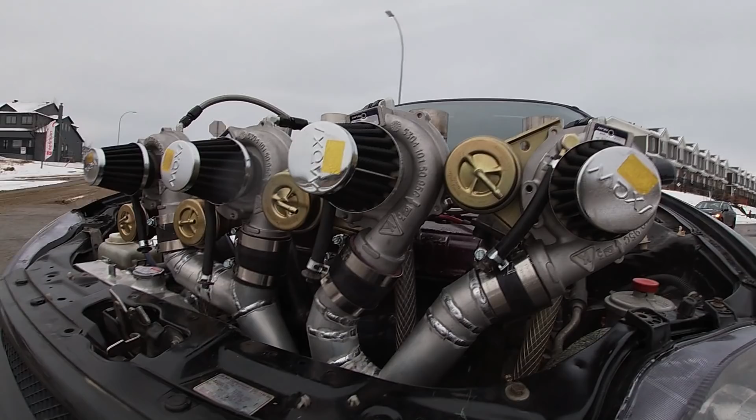Thanks, peace, easy. Let's start the video. How are we supposed to test when it's snowing out? What the hell? We're back today.

We're going to do some more testing on this thing. I did a lot more reading on the Hondata, a lot more playing around, and I think I've got some more stuff figured out with it. I did get my stickers in, look at them, that's me.

I remember in the last video we hit about 5 pounds of boost on the boost gauge, and then you guys said these wastegates are about 5 pound springs. So to put that to the test, I loosened these off fully, put 2 turns on this nut, and pulled the actuator so there's actual tension on it, meaning any little bit of movement isn't going to open the wastegate right away. I'm hoping that'll hold more boost.

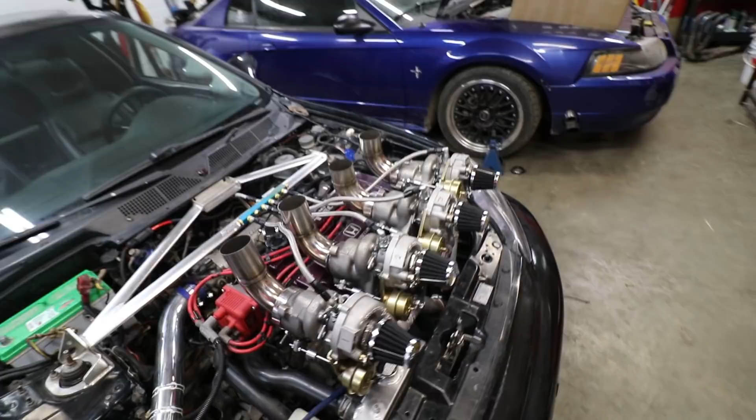We still have the race fuel in it, let's get the laptop set up. I'm so excited just to drive it, even though it's snowing outside. So yeah, I got a GoPro on my head. I spent a lot of time just trying to navigate the S300.

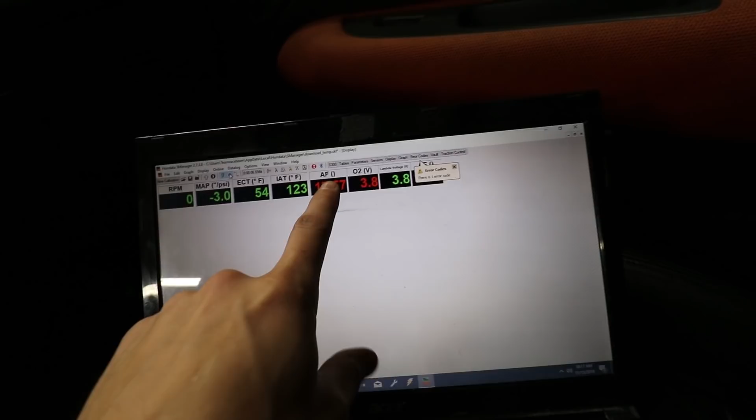Learning where everything is, trying to change all the tables so it's something that I like. Right now I'm working on trying to get the air fuels instead of being a voltage or a Lambda, I'm just trying to get them to an air fuel number, because in my head air fuel numbers make sense more than Lambda numbers, even though Lambda's super way easier since 0.8 is good and 1 is stoich, and above that it's lean. But I'm just doing what I gotta do. There we go, I just had to reset it. Now I got it from Lambda to air fuel numbers, so now we can start there.

We have 1 error code, I believe it's intake air temp. Yeah, we don't have that hooked up. So we can do a data log, look at our thing, and make changes from there. And that is the basics to our tuning.

See how shit the roads are right now too.

I'm just waiting for the coolant temp to come up. It's only at 132, I think it hits boost cut before 140, so... the guy on the roof's giving me a weird look.

Quick little pull, we hit 5 pounds of boost still. All right, my GoPro died, but I believe we hit 6 pounds of boost on the gauge.

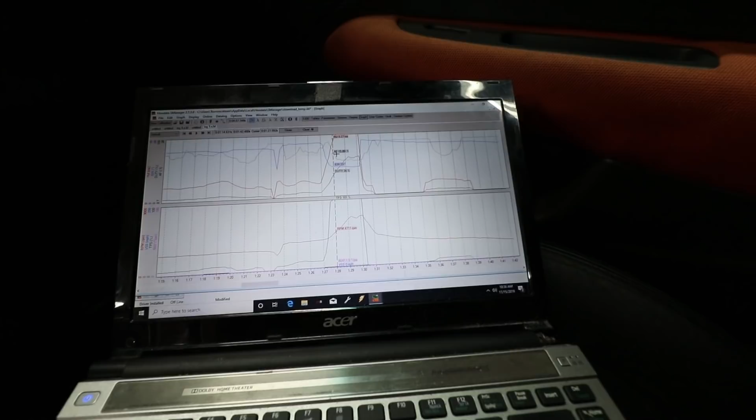Our map isn't actually dialed in perfectly, so when the car is off it reads like -1 mercury, a vacuum. So here's our log from our last one, we go full throttle here. We're at 1 pound of boost at 4,500, 1.8 psi at 4,800, 2.7 at 5,000. Remember, last test session our map only read 3.1 before we made any changes.

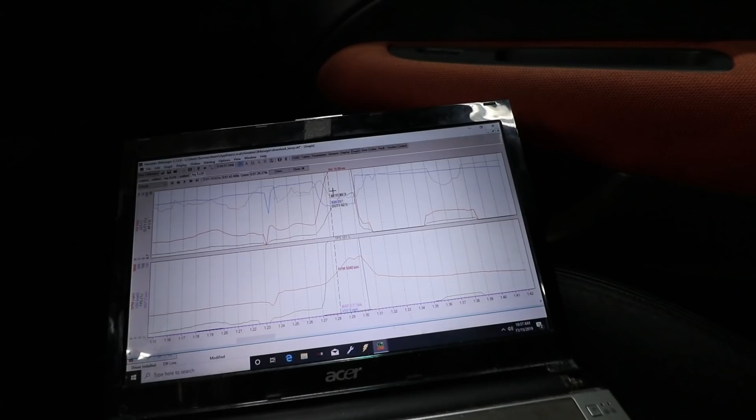So our air fuel is 11.8, 23 degrees of timing on race gas at 5,000 RPM, 2.7 psi, and at 5,800 we're at 3.5, so we already broke our last PSI record there. Up to 4.0 at 6,600 RPMs, still 11.4 air fuels, 23 degrees ignition timing.

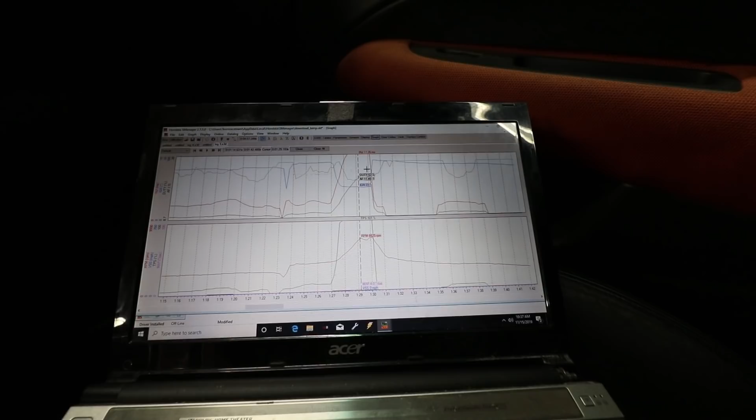That might be a little bit much, I might take some out. 4.1 PSI is our peak for now. So once again, we're trying to test in shit Canadian weather, we have studded winter tires on the front, actually.

But we really got some diagnosing to do, because it's not making sense why they're not making more boost than that. I'm gonna hook up my air compressor, try and turn the regulator all the way down. And there goes the heater.

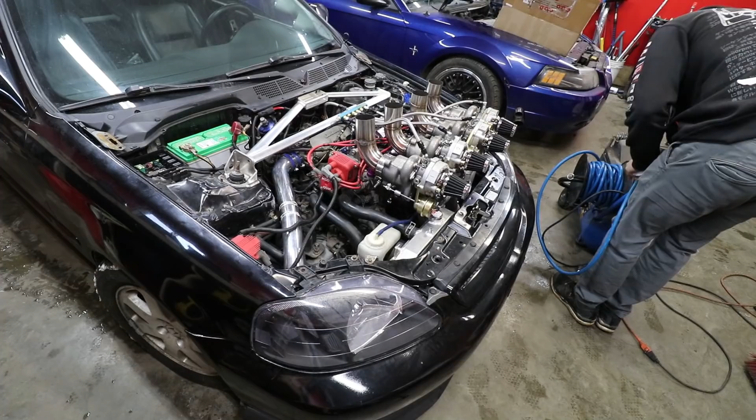I'm just gonna unplug one of these wastegate lines and see how much pressure it takes to actually open it. Well, that's not very accurate at all. This isn't gonna be the be-all, end-all of tests, just trying to diagnose things. Better to diagnose it now than be on the dyno with Brent and not be able to make any boost.

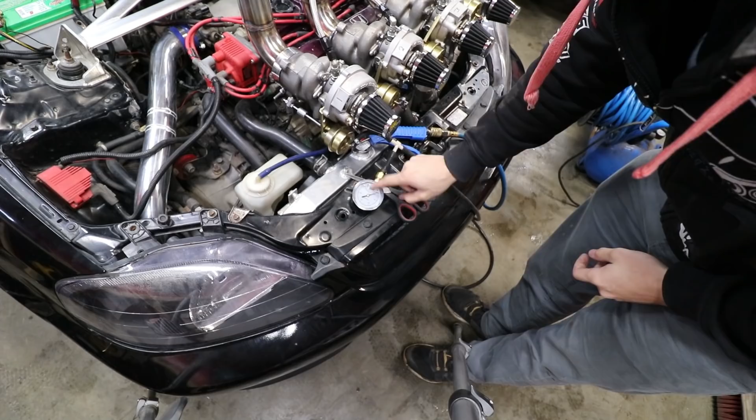Okay, let's see if we can tee in like a pressure gauge or something here. Do I have a pressure gauge? So this is gonna be our little makeshift thing, we have a 100 PSI gauge. It's not gonna be super accurate, but it does include a 10 pound increment on it, so anything less than 10 pounds will tell us this thing is like a really weak spring.

Okay, so it's fully open at 5 PSI. You see that? I hope you guys can see it. Let me readjust this camera here, keep an eye on that. I'll put this right like here.

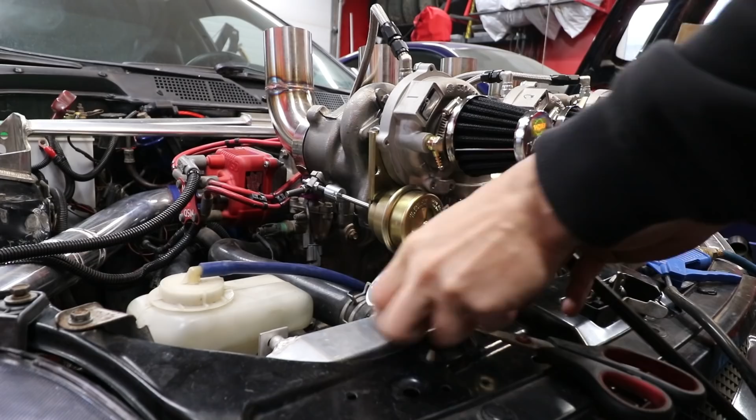Now we'll do this real quick. You can see that this line right here references 10 PSI, we don't even come near it, and you can see the wastegate is fully open. So, in fact, according to this gauge, it's fully open at like, I don't know, yeah, 5 pounds.

Not even close to 10 pounds and it's all the way actuated, so now we've got to come up with a solution for that. I didn't anticipate this because right here in the specs it says internal wastegate is a 12 PSI wastegate. You can see here, 12 PSI. I figured 12 PSI would probably be plenty, but 5 is not enough.

So that's why it's just tapering off boost even though it wants more. Spool can be slow because as soon as it hits 1 to 3 pounds, it seems like those wastegates are opening. Since it's such a small turbo, I'm not sure if they calibrate the spring size by overall boost on a 1.8, since a 1.8 only runs one of these turbos. I'd guess it's probably a 5 pound spring in it, but the wastegate flapper is fully open and boost is just creeping itself up to 12 pounds. I'm pretty sure that's the case.

Here's my simple hood rat solution just to test my theory. We block off - okay, that one's not gonna work because that was backwards. So what we're gonna do is block off and run the wastegate open to see if we can build any more boost faster.

Exhaust back pressure is still gonna push these wastegates open on the flappers, but I'll set boost cut to like 10, 12 pounds just as a safety measure. I'm just going to do a pull and see if we can climb a little past where we've been getting stuck. If we can, that means the engine is fully capable of spinning these turbos - it's just the wastegate actuators that aren't working in our favor. If that all works, maybe we'll make some sort of boost control setup for all four of them and go from there.

So we'll go back out and test it one more time, and hopefully no one calls the cops on us. Put our helmet cam back on and try this again.

Handbrake turn! Yes! Let's do hood rat shit!

Turbo's already spooling, go! Yep, we hit 10 pounds baby! That feels like more power! More power baby, and more power baby! Oh yeah, this is what we've been waiting for.

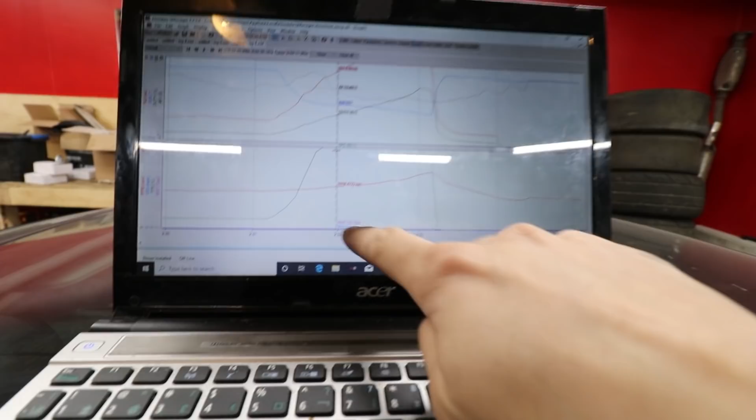Bam, bam, bam, our test was a success. We made more boost - I saw it hit 10 pounds on the gauge before I let out at like 6,000 RPM. We have the laptop, so we'll get the actual logistics because I like to say things are bigger than they actually are, especially to my girlfriend. Log 6, baby. Oh boy, that's a lot to look through.

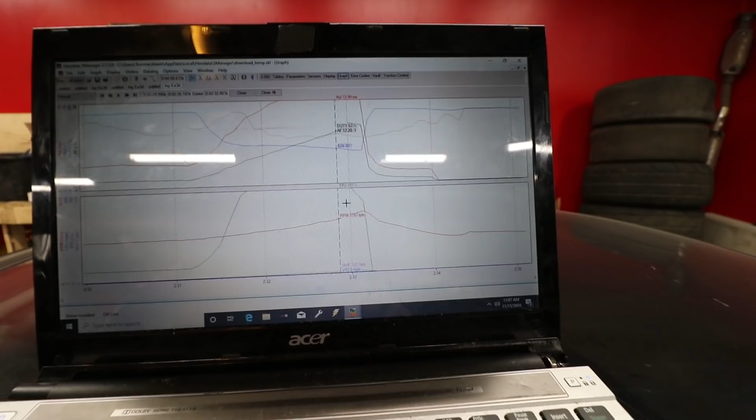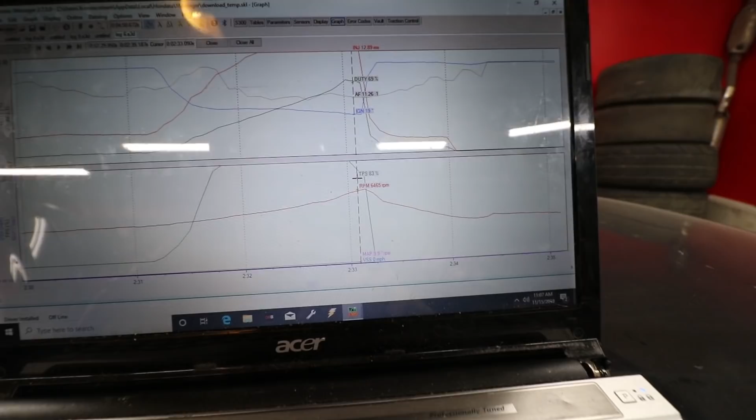This looks like our biggest one right here. Here it goes: 1.6 pounds of boost at 4,700 RPMs, still 2.1, 2.8 at 5,000 RPM, 4.1, 5.8 - that's a new record, 6.6 at 5,500, 7.2 at 5,700, 7.7 at 6,000, 9.9 PSI at 6,500 RPMs, and then it held 9.9.

I think we let out though. TPS is 83% now, so we were letting out right about here. We let out at 6,200, 8.6, and we still made 9.9.

Hey, that's exciting! Except for the fact that we have to figure out how we're going to control the boost in these things. I have a feeling that when we get to the dyno, those wastegate hoses are coming off and we're just going to run whatever it can run. We're just gonna full send it. Moon tune, baby. I have a feeling the wastegate flappers are just gonna open themselves up, because I'm trying to explain this the best and easiest way I can.

Inside this wastegate, there's a rubber diaphragm, round, with a certain diameter and surface area. If you put 5 PSI on top of the surface area of that rubber, it's enough to overcome the weight of this spring. Now there's also a circle where this wastegate flapper is, but its diameter is only about half the size. So your exhaust back pressure can still manage to put enough pressure on that little circle to overcome the weight of the spring. So the turbos might actually regulate themselves through the wastegate flapper with excessive exhaust back pressure.

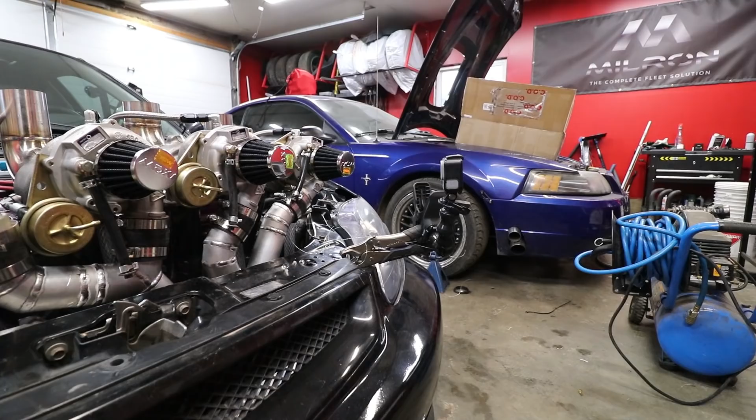It's not ideal. We're gonna try and get a setup in the front, whether it's a boost controller or a manual boost controller or something, but that is big headway.

I also did not check to see what our timing and air fuel was to make sure that we were safe. 11.5 air fuel, our injector duty cycle was 72%. We might need bigger injectors, I might borrow some from someone. Someone's got 1,000 cc sitting around somewhere. 19 degrees of timing, 11.5 air fuel, and 8.6 pounds of boost, which is perfectly fine in my books anyways. What do I know, I'm not a tuner.

Trying to get all those best angles. We got vice grips here, and then we clamped onto the vice grips. I'm trying to use fishing line to secure the GoPro just in case it falls off, but I can't tie knots, so if you can't tie knots, just tie lots. The best angles, baby. One more test, let's just see if it'll hit 15 pounds. Why not? We're getting the good footage, right?

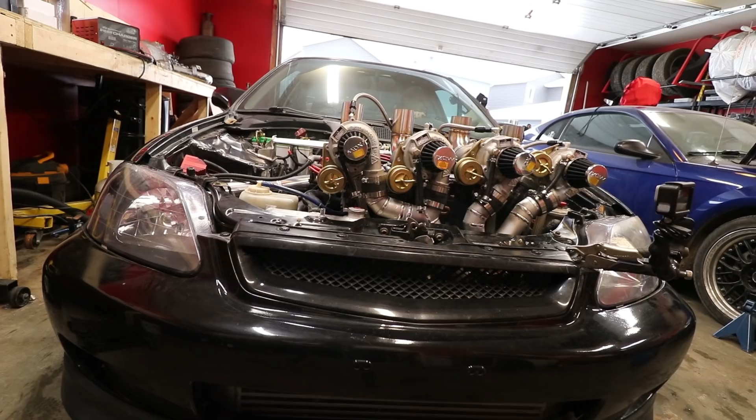I think this is our first real test of driving it around and getting it hot, because the exhaust sides of the turbos are actually starting to bake the paint off them kind of. And we hit boost cut at 15 pounds of boost. Sorry, not sorry, I guess she's getting the moon tune. That's with no wastegate lines hooked up too, so we might have to put some sort of boost controller in it. I purposely set boost cut so it would hit it.

Well, that's not fucking good. I'm like, where's my phone at? And I'm looking around, looking outside and everything. It's right here, underneath my tire. How did I do this?

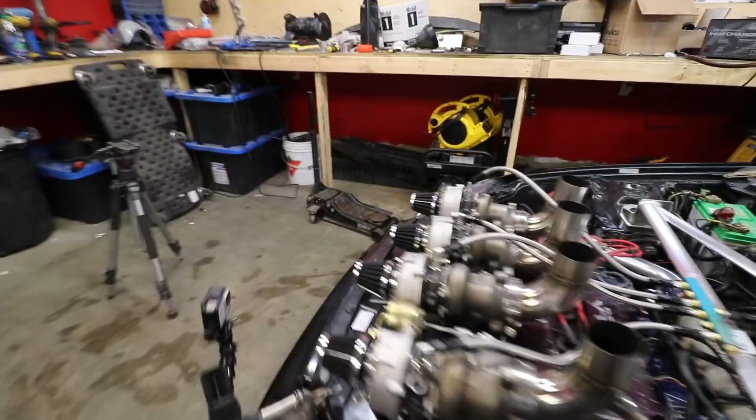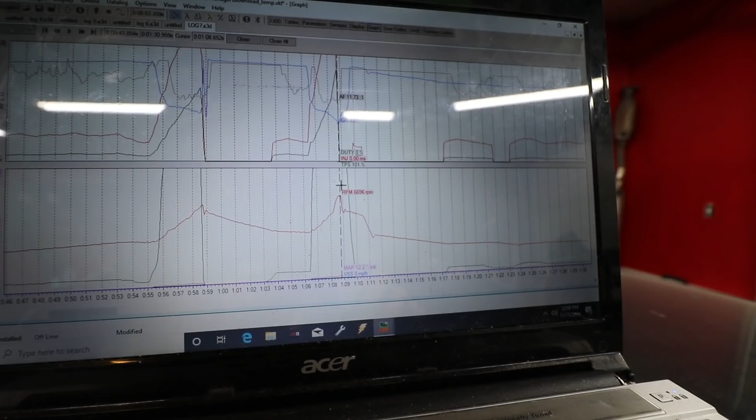Now let's see if it's for sure broken as fuck. Yep. Awesome, let's go buy a new phone, I guess.

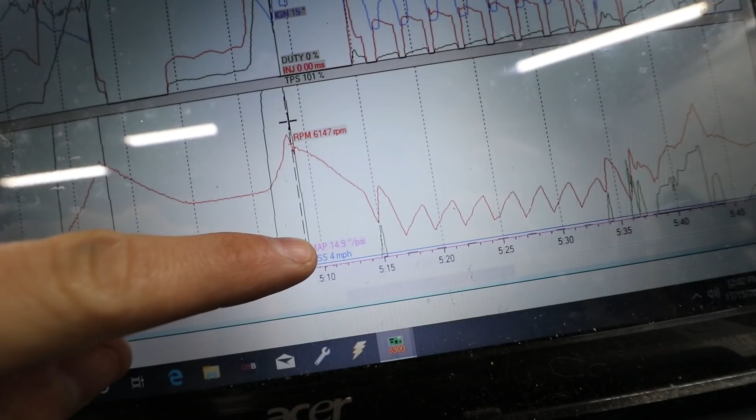Looking at the floor over here, I can see like a little bit of oil in the water because it's like rainbow. So I don't know if we have a little oil leak or is it residual oil from something, but turn that off.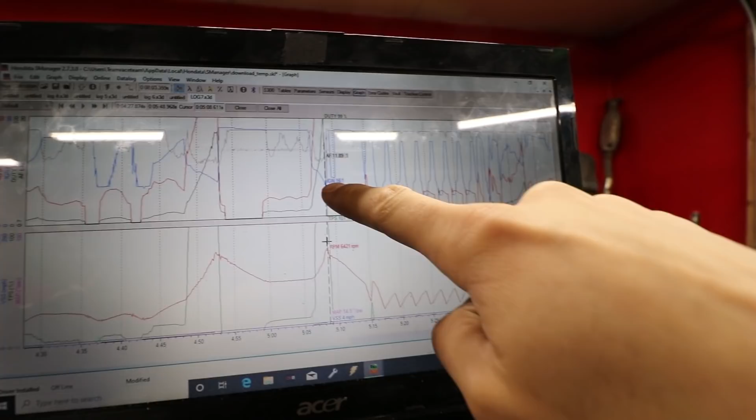Let's go ahead and look at our log again. This one is like 1 minute into my run. Boost cut was set at 12 pounds here, and we hit 12.2 pounds. So we can definitely make the boost.

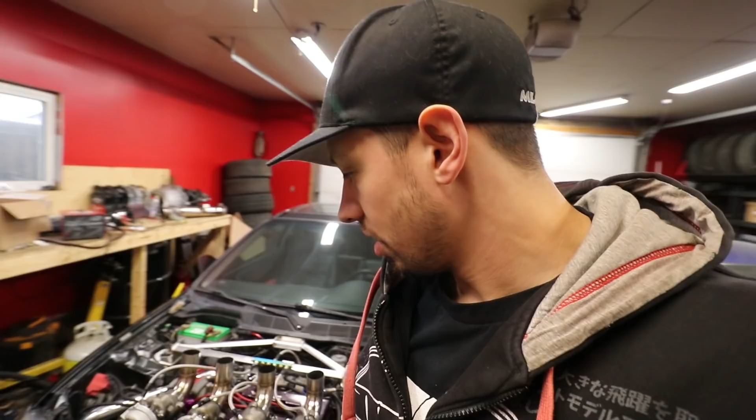Oh shit, my laptop is dying. But I believe we hit 15 pounds of boost as well. Maybe right here, there it is, that's our biggest one. 14.9 pounds at 6,100 RPMs. It hit boost cut though, that's why it's down RPM. It probably would have been a bit higher than that realistically. Yeah, 6,400 RPMs, 14.3 pounds.

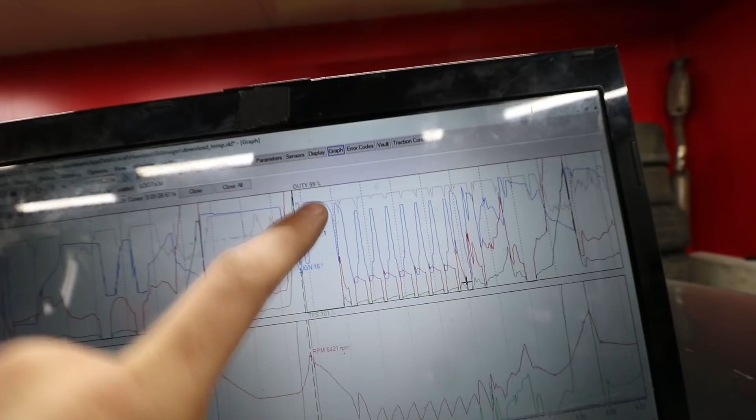16 degrees ignition timing, 11.8 air fuel, so looks like we're all good there. And the other thing is VTEC is not enabled because I don't have a speed sensor. I tried enabling it, it didn't want to work, so I'll let the tuner figure that out. I just needed to make sure that we were going to create enough boost that when we went to the dyno, it's not a waste of time to do it. So now it's just to button things up, get some sort of boost control on here, because we should probably try and control boost before we send it to the moon.

And I think it's ready for the dyno numbers, to be honest. It was stupid pig rich at the top end afterwards. I don't know why, maybe I blew something up. I don't know, we can do a compression check as well to see if we hurt anything. Oh, that could be an issue as well. Look, our duty percent is 99, so that's it. We're out of fuel, we need bigger injectors. We maxed out our 550s.